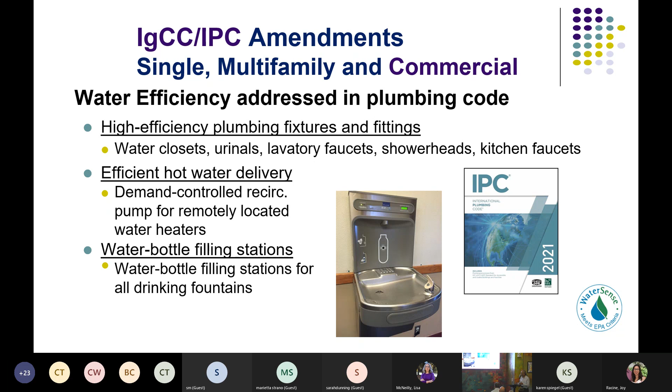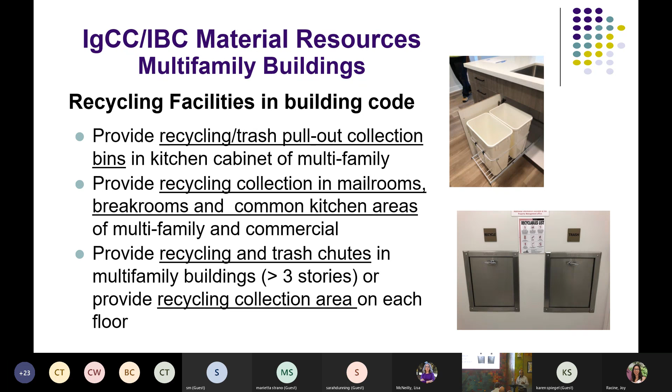Another thing that happened last week is part of the building code. We made an amendment for pull-out recycling and trash bins in kitchen cabinets for multifamily, not single family, but multifamily projects, and also trash and recycling chutes. This is also something that could be considered part of green building, and it is in the Green Construction Code. So as we move forward, I'm making the case here that there's a lot of things we're already doing. By adopting the Green Construction Code, it isn't a significant change because most of these things we're doing already - at least close to half of the things we're doing already.

And finally, to the mechanical code and the energy code and the building code - there are already requirements for sound insulation between apartment units, been in the code for quite a while in previous editions. This is also considered part of the Green Construction Code, but it expands beyond that, looking at different other uses for separation, sound insulation between uses. So what we're looking at now, all new apartments have to have insulation between the apartment units and between the apartment units and the common spaces.

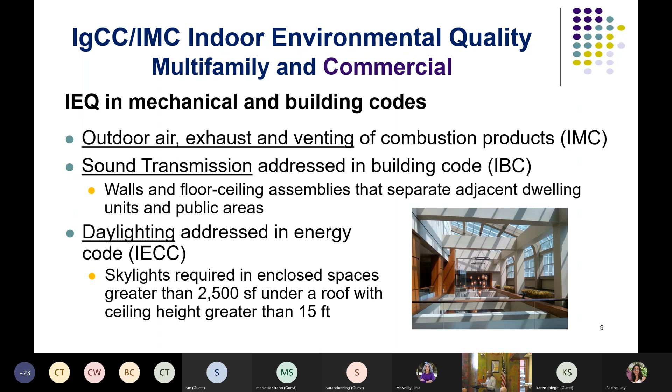Also ventilation, outdoor air, daylighting - these are things we're doing at some level already in the baseline codes. So that's what we've done so far.

Where do we need to go now? These are the three remaining codes that need to be adopted, or will be considered for adoption, by City Council: the residential code, the energy code - and tonight we're just talking about the energy code - and the green construction code.

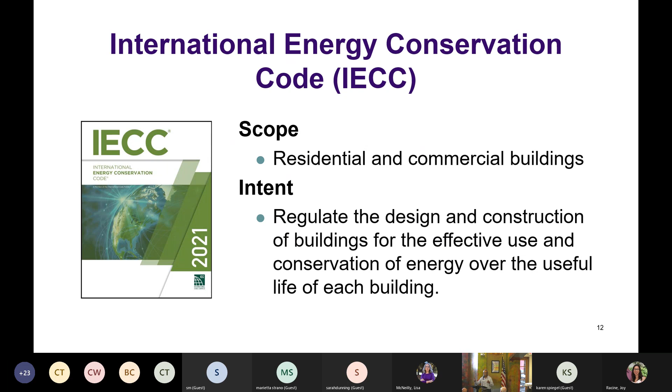I want to really make a distinction and a clear point here. Traditionally, building codes have been about health, safety, and public welfare. The International Energy Conservation Code, which first started in the year 2000 - that was the first edition of this code - has a different mission. It's to regulate the design and construction of buildings for the effective use and conservation of energy over the useful life of the building. It's not just looking at energy efficiency today, it's looking at it over the lifetime use - that could be 20, 30, 50, 60 years. It's looking long term, particularly for the various components of the code.

That's why these elements are part of the code: the thermal envelope, the exterior wall, the ceiling, the roof, and having good insulation in there. Over time, HVAC or air conditioning units are upgraded. We also have lighting that is usually upgraded, but the envelope, the thermal envelope, usually is not rebuilt or only occasionally improved upon.

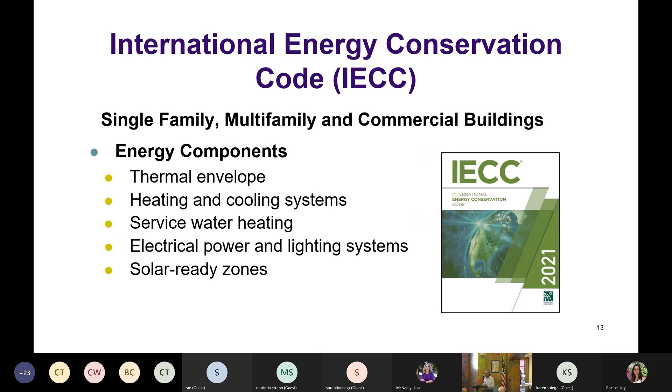Ceiling insulation can be added later, but wall insulation is usually prohibitive to improve after the fact. So it's very important to get it done right the first time—that's what the energy code is for.

In Scottsdale, we've had many trends over the last 20 years, tracking them since '98, particularly with our green building program. We've had many energy code updates. At one point we required new construction to exceed baseline codes by 15%, something we incorporated a while ago.

We recognize cathedralized attics, where insulation is underneath the roof deck. This was very innovative maybe 20 or 15 years ago—some cities were restricting it, but we embraced it and considered it a higher performance method of construction and energy performance.

Third-party energy raters that we've promoted—LED lighting was cost prohibitive at one time. We were promoting it and people said they couldn't afford it. Same for double pane windows; that only became prevalent around 2000. Before then, only high-end builders or a few select builders were doing that. Now with standard construction, everyone's doing it. All of this has transpired over the last 20 years.

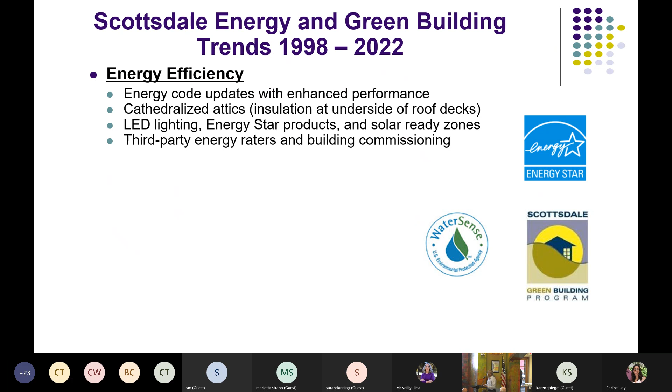Indoor quality, water efficiency, I would have given you examples. Sorry about that, I guess I have to hold the mic.

Then heat island mitigation—there's been some efforts on that, and we do have a heat island mitigation plan in the works that we're going to get more serious and assertive with. But we have been seeing a trend.

And then finally, distributed solar generation. We've been seeing and tracking solar installations for about 20 years now, since about 2002. We're seeing a significant number every year permitted. We actually have a designation for green solar permits, so it's easy for us to track and see the total numbers.

This year is going to be another record year. I was just looking at the permit numbers today, so far since the beginning of the year, and we're going to be over 1,000 permits issued this year. I know it doesn't seem like much, but last year it was under 900, the year before that was 700, and the year before that was 500 or so. Every year the numbers keep going up, and we're going to continue to see that trend.

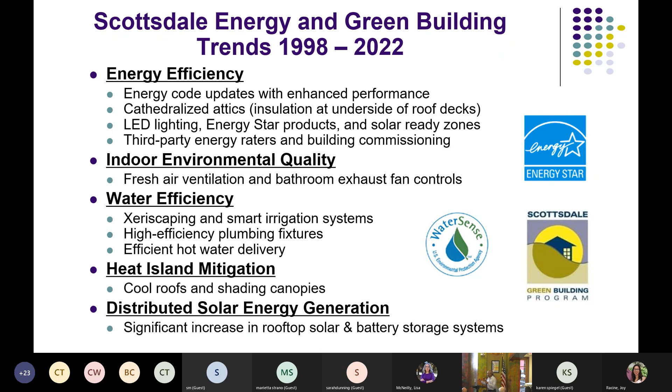And this is reflected in some of the proposed amendments. So the major changes in the IECC and the amendments—I'm not going to spend time on each one of these, but I just want you to see them, and also we have some of these items on the poster boards in the back.

They're also highlighted in your handout as you came in. There should be two forms with yellow bars in them. They also have numbers or letters at the top—one is for energy and one is for green. So I'm going to be identifying those as I go forward here.

This is important to know: for residential, the insulation values are going up for ceilings, from R38 to R49, and this edition of the code is close to a 10% improvement over previous codes. So that's why we see these new provisions—duct leakage testing, high efficacy lighting, raising the bar on lighting again.

There's also EV capable charging that we're proposing. It's not in the base code—there's been national discussion of incorporating it, and it will most likely appear in the 2024 edition. So what we're saying is, why wait? Let's incorporate it now into the amendments.

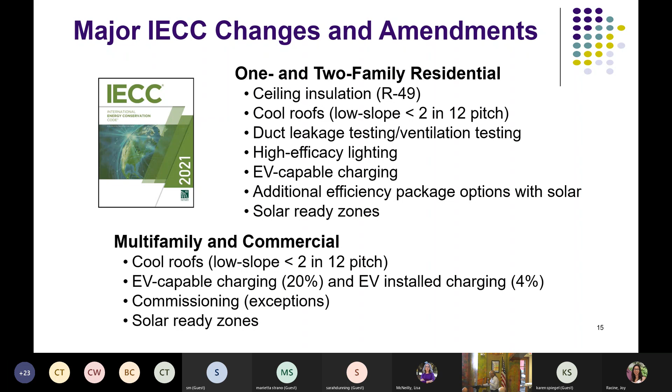There's also solar ready zones as part of the code. The amendments are slightly different between commercial and residential, and I'm going to spend most of the time on residential. The first one, A—there's A, B, C—correlates with what's on the boards around the room and with your one-sheet handout, which has the energy code on top, the 2021 International Energy Conservation Code.

So, heat island mitigation—this is already required in the commercial provisions of the energy code, so it's not brand new, but we're proposing to incorporate it for residential. We're only looking at low-slope roofs, meaning a slope of 2-in-12 or less, so relatively flat, low slope roofs. We're seeing trends over the last 10 to 15 years that flat roofs have polyurethane foam with a white elastomeric coating on it.

So it's very common, not really anything new or breaking technology. All we're trying to do is create a baseline standard, particularly in regards to heat island mitigation. This is something that should be done, and we're recommending it.

Also on the commercial side, there's an option to trade off the cool roof for a higher efficiency building, whether through the heating cooling system or insulation. You can do a performance analysis and trade off doing the cool roof. So the current code for commercial buildings has this requirement, but you could trade it off if you do other higher efficiency things.

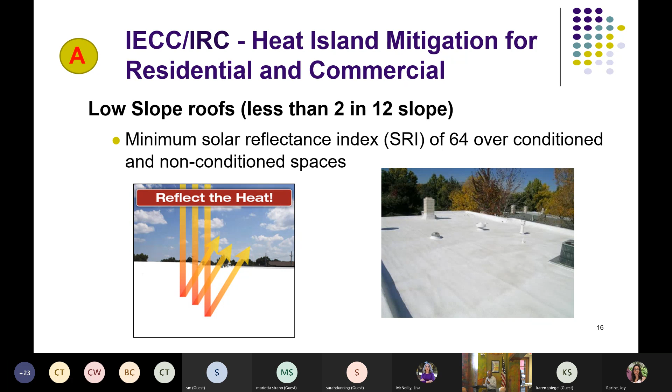So that's A. B is one of our favorite topics here: electric vehicle charging. What we're proposing is to have EV capable. In the industry there are three terms used: EV ready, EV capable, and EV installed.

EV capable means you have the electrical capacity in your electrical service panel. What we're proposing is to have that reserve space in the electrical panel identified, with a label that says future EV charging. The homeowner would always know they have that capacity because it's labeled in the electrical panel with a reserve space to install it. EV ready is actually putting in the breaker and running the electrical line to the garage.

to an outlet box. We started off proposing that, but we heard from the Home Builders Association about potential issues of not knowing what size breaker you'd need depending on what size charger you get for the electric vehicle, whether it's an electric truck like the Silverado or whatever requires higher amperage. So we're looking at the baseline requirement, which would be EV capable: having the electrical capacity and a reserve breaker space that's labeled.

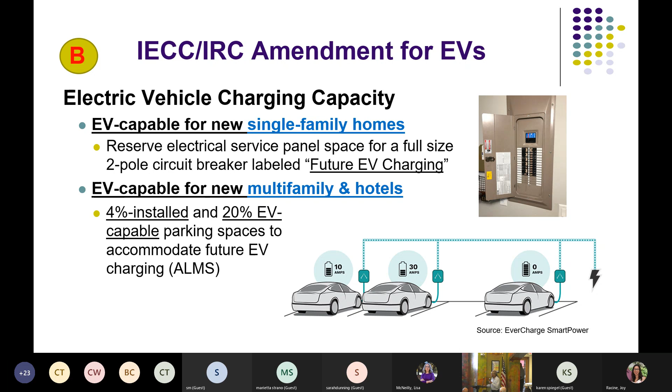We searched around the country and looked at model standards for this, and also looked at what's being proposed for the 2024 energy code in regards to EV charging. We feel this is a fairly conservative number - we're seeing higher numbers in other jurisdictions and the proposed national standard. So we feel our numbers are very conservative in this regard. So that's the EV charging.

Onto C, which is additional efficiency power package options. This is brand new in the residential code, and the only thing we're adding is item 6, an option for solar. This is not requiring solar installation, only putting in the option. The energy code, in addition to your regular baseline requirements, has a new section saying you also have to pick one of these items. The unamended code has 5 items; we're adding a 6th, the solar option. So it's offering more flexibility to the builder, designer, and homeowner to choose from one of these 6 items.

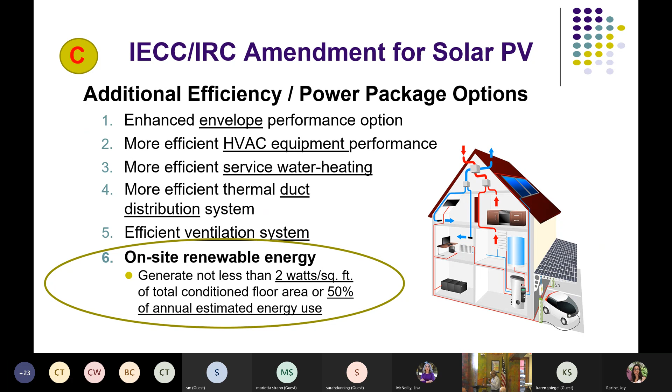Finally, on the energy code, there's an appendix chapter for solar ready zones. This is something we already adopted with the 2015 code - we adopted the 2015 codes back in 2016, and it became effective January 2017. So since 2017, every new house built in Scottsdale has a solar ready zone.

It makes it easier for homeowners in the future to put in an efficient solar system, because there needs to be a free, clear, and unobstructed area on the roof. That's what this is requiring. For single family, a minimum 10%, but not less than 300 square feet.

We added the 10% this year as an amendment, because we have large houses in Scottsdale, and 300 square feet just isn't going to do it for a 5,000 square foot home. So it should be proportional, and that's why we added the 10%, but not less than 300 square feet. What's totally new in this code is for commercial.

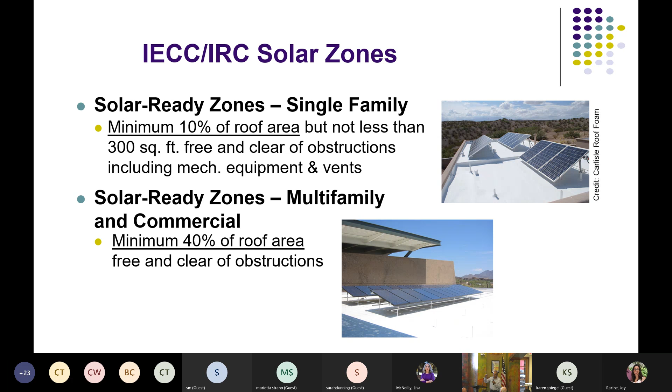Previously, we only did the solar ready zone for residential. Now it's going to be for multifamily and commercial, with a minimum of 40%. That's because the energy loads are much higher in commercial and multifamily buildings, and usually they're multi-story too, so it's a greater demand of energy, and that's why it's a greater percentage.

Now I'm going to move on to the Green Construction Code. But before I leave the Energy Code, we have a more detailed analysis that goes into more of the provisions and proposed amendments in the Energy Code. It's a 6-page document of our assessment and some of the benefits we see and expected outcomes of the other changes, including what we talked about. If you're interested, I have a stack of the analysis reports up here.

Okay, so the Green Construction Code only applies to multifamily greater than 3 stories and commercial. It doesn't apply to single-family homes. And the intent is different. It's not just health, safety, and public welfare. It's also, in terms of extended public welfare, reducing emissions from buildings that can contribute to climate change, enhancing building occupant health, conserving water, promoting sustainable regenerative materials, and enhancing resilience to natural and human-caused hazards. This is the purpose of this code.

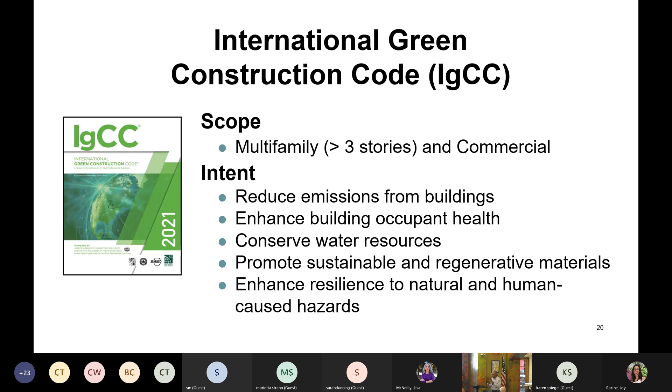There are 26 adoptions around the country of the Green Construction Code, 8 of which are mandatory. Here in Scottsdale, we adopted this early on. The 2012 version was the first one we adopted, but it was voluntary. Later it became tied into zoning, so currently, even today, we require this as a trade-off for zoning, for higher density and for zoning bonuses and density increases—you have to follow the Green Construction Code. We've been doing this for at least 6, 7, 8 years, and we have over 30 projects following this.

So these are, as I mentioned, over 30 projects in Scottsdale. Most of these were done as a result of zoning bonuses, and so they have to comply with the IGCC. I can mention some are under construction right now, such as the Maya Hotel. There's also some apartment buildings at Fashion Square. There's the Caesar Republic Hotel—that's also under the IGCC.

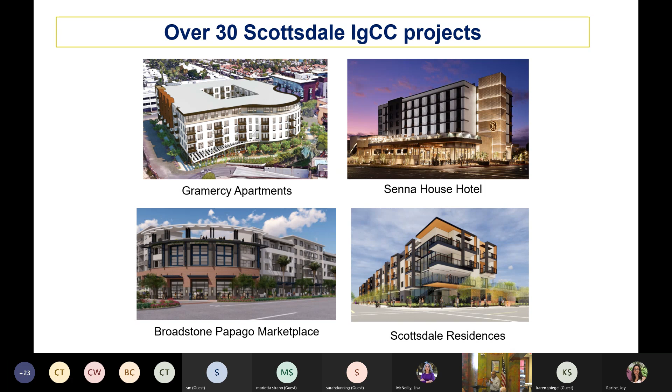The first three required a lot of cross-referencing because we're already doing a lot of the site stuff already. We have an environmentally sensitive lands ordinance, a native plant ordinance, a water conservation ordinance, and a natural area open space requirement. We have a lot of requirements for the protection of our native plants, and we're not trying to reinvent the wheel—we're proposing, as part of the amendments, to reference what we're already doing.

Same for water, with the water conservation ordinance. And with energy, we're proposing to just comply with our adopted energy code, as we were just talking about. We wouldn't create other guidelines for energy efficiency—we already have that as part of the Energy Conservation Code. Indoor environmental quality has some crossover to the mechanical code and the building code. Other than that, the remaining items are the new stuff that would become mandatory. That's on the 7 boards that we have in the back.

So I'm going to reference some of those numbers of those new requirements. Let's start with A, hardscape. The IGCC requires 50% of the hardscape, primarily asphalt since concrete is lighter colored, to use a solar reflectance index that materials have to comply with. So it's either shading 50% of the dark hardscape, usually asphalt, or having a light colored surface material like concrete, trying to reduce absorption of heat in the ground. This goes hand in hand with our heat island mitigation plan.

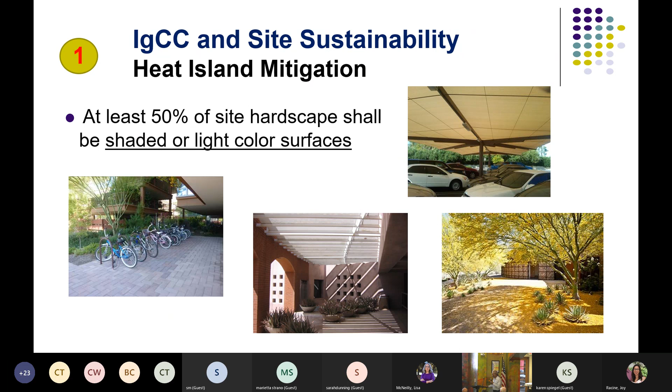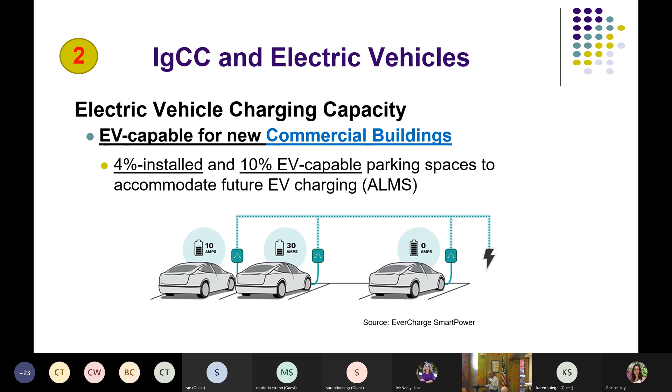Number 3 is water use efficiency. We already addressed water efficiency indoors with the plumbing fixtures. This is for outdoors, for the landscape. We communicated with our Scottsdale Water Resources Department, and they're pushing to have greater efficiency with landscape irrigation. These provisions are already part of the Green Construction Code. Our Water Resources Department suggested a few amendments, so we modified it some, but essentially it's still the same outcome: efficient irrigation system and smart irrigation controllers, which happens to be WaterSense labeled.

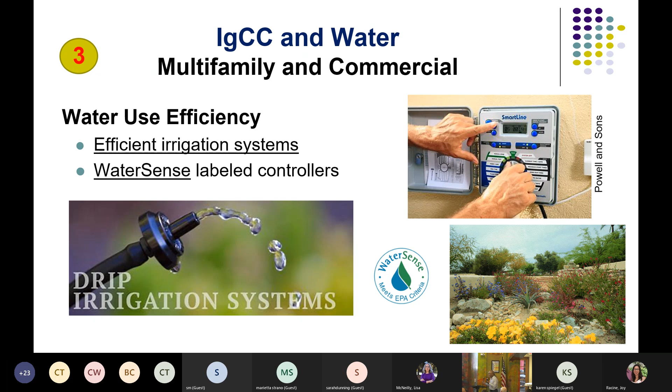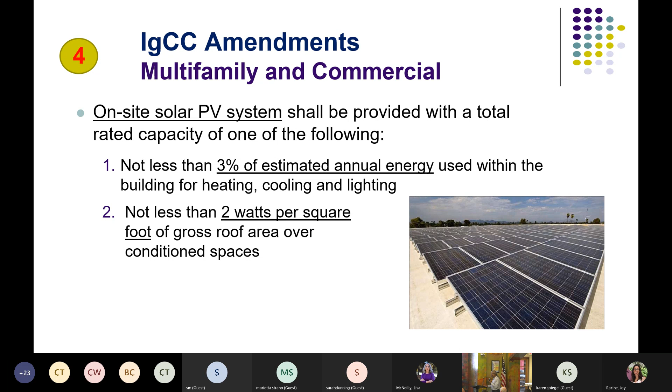Number 4 is photovoltaics. Under the Green Construction Code, it requires that PV solar systems are installed. There are two options: one is a system that could generate not less than 3% of the estimated annual energy used, or one that produces not less than 2 watts per square foot of gross roof area.

We've looked at some current buildings like the Maya Hotel. They're currently required to have solar. Using the 2 watts per square foot, I calculated what size system they would need: a 26.4 kW system, which would cover about 13% of the roof. The Maya Hotel has amenities on the roof deck - it's occupied, has swimming pools, a bar, a lounge area. With this rough calculation, only 13% of the roof would need solar. On this diagram, you can see there are some solar panels on the roof on that one end.

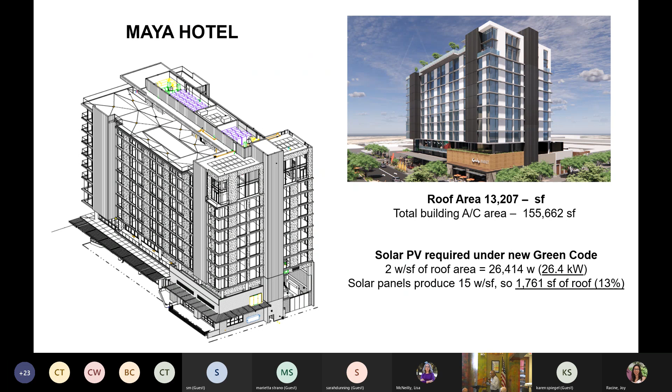We also did this on a number of other projects to see how it would impact the roof, and it seems this is a very conservative number, the 2 watts per square foot. But we also have the other option, the 3% of total annual projected energy load offset. So there are options we're offering, and it seems fairly conservative in terms of energy. The average size solar system being installed in Scottsdale is about 10 to 12 kW. This 7-story building only has 26.4 kW - it's not that much larger than what's on the residential.

Number 5 is indoor environmental quality. This is off-gassing, trying to lower the amount of volatile organic compounds, VOCs. The reason it's 85% is we amended this because the 2021 Energy Code states 100%, but currently under the current edition of the Green Construction Code we're using, it's 85%. We want to be conservative as a mandatory code to only do 85%. All the major paint manufacturers have already transitioned to this. Even at your home improvement center, the majority of everything is low VOC - they even have it on the can. So it's not really an impact. It's one of those low-hanging fruit items again.

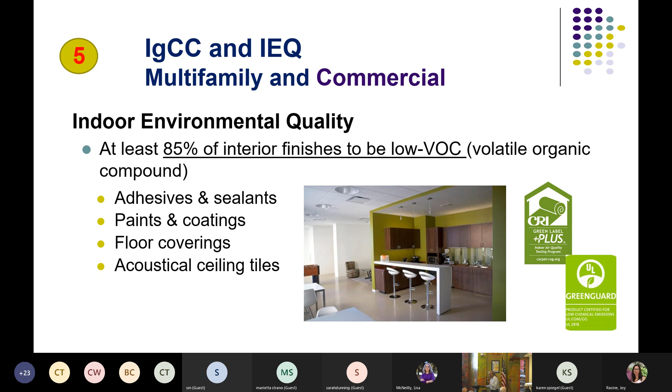Number 6 is construction waste management, diverting not less than 50% of the construction waste from landfill. That's something we're doing now with our green construction code projects, and we're proposing to continue this with 50%.

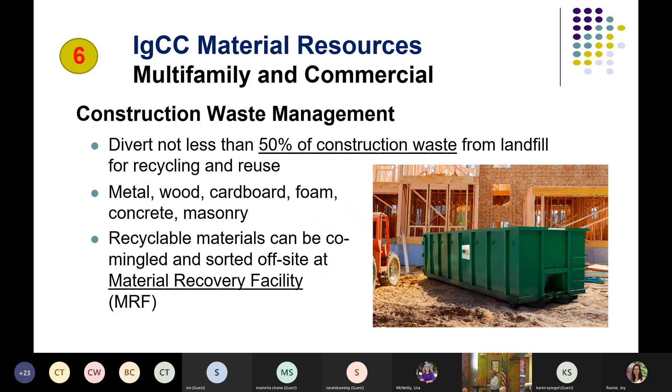And then there are a couple of other options: bio-based and wood, meaning that the wood and lumber would need to come from a sustainably managed forest. There are programs and certification labeling programs for that. And then there are environmental product declarations. They're like nutrition labels, just telling you what the composition is of a product. It doesn't require you to do anything except make the ingredients of any product transparent. It just promotes transparency, particularly related to environmental impacts.

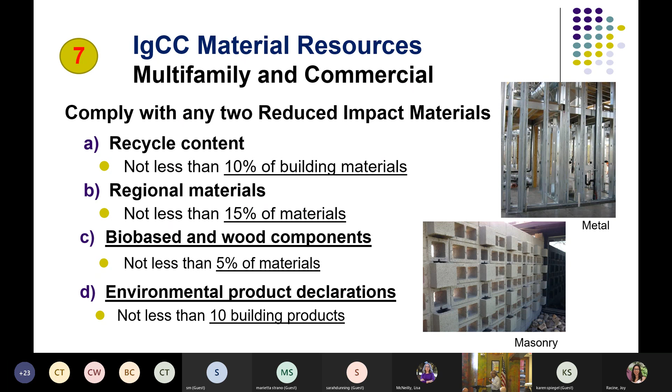And to health impacts. Finally, I want to say a lot of this stuff is low-hanging fruit. These are strategies in the IGCC that have mostly become mandatory or are in transition of becoming mandatory because they're so easy to meet in terms of costs. They're cost neutral and beneficial for the buildings. So that's my overview, and I'm going to open it up for questions now.